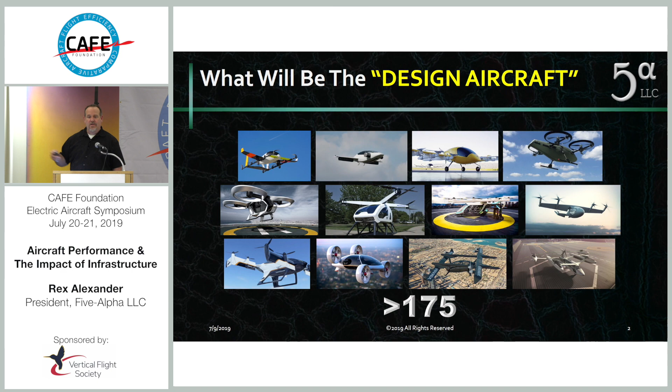So what we're basing a lot of what we have on today is what we currently have in infrastructure today. When we look at infrastructure, we have airports and heliports. I use vertiport - that's the most common term. I've heard a bunch of different terms out there, but vertiport's the one I'm going to use. Airports, we pretty much figure that everything's going to be operating at an airport. You have the room to land a helicopter there, jets, turboprops, and we expect vertical lift and takeoff vehicles to land and operate there too.

Heliports - the assumption is that helicopters and probably vertical takeoff and lift aircraft, depending on the standards that we come up with, will operate there. Now I'm getting a lot of calls from investors on, hey, I have this heliport, I want to make it a vertiport, what should I look for? It gets a little more complicated than just a piece of property somewhere. You have a lot of different layers you have to go through. Then the vertiport - we haven't really decided exactly what that looks like. Personal opinion, it's going to look very similar to a heliport with some minor nuances.

Now, the key question is here, when we look at all the things that are going on in this industry today, specifically around the idea of some of the things we see on video, these wonderful animations.

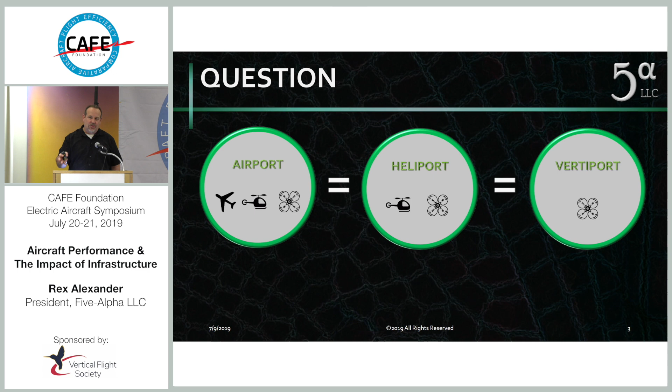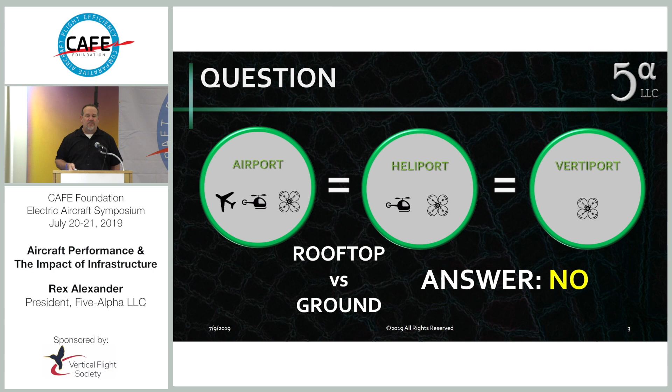Even some of the vehicles flying today, you see these tests in a pristine environment at an airport with lots of room. Now, having worked in the other world, rooftop versus ground, a lot of my work is up on buildings, and it's a whole different environment. We have to take a lot of considerations into account there to build something safe. So are these equal? Yes and no. On the ground at airports, yeah, probably. But once you go on the roof, all bets are off.

Now, key performance criteria, we look at helicopters, so I'll look at what we deal with today. Pilot workload is a big one - how much work is the pilot doing to keep that aircraft under control? Now with autonomous aircraft, how much work and how can the computer keep up with that? Probably better than the pilot in many cases, but that's something we have to factor in.

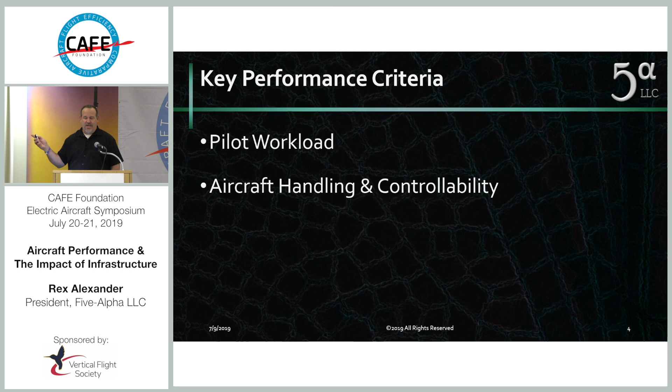Handling and controllability characteristics - some aircraft are better than others. I've flown many aircraft that deal with these environmental issues better. Also, training and education, knowing what you're getting into before you get into it, has an impact on this. Aircraft performance margins - how much do you have before you over-torque or over-temp the aircraft? I've seen bad infrastructure cause this to happen quite often because the pilot was asking more from the aircraft than it was capable of providing that given day.

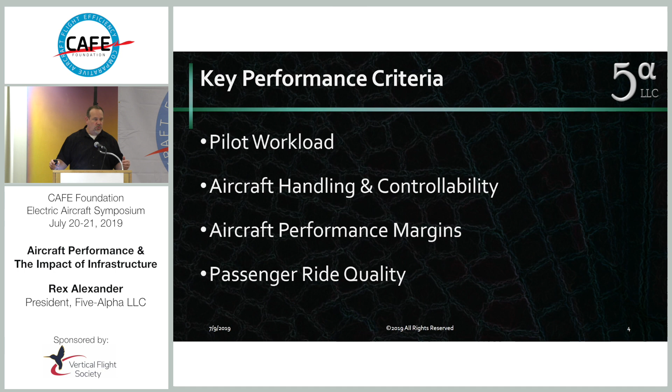And then the passenger ride quality - this is one I'm working right now with NASA Ames and PK's folks. The idea is you don't want passengers getting off your aircraft with a sick-sack in their hand every time, or they're not going to come back. So we're actually creating infrastructure and doing simulations on what this looks like, and what this vehicle can and can't do in this infrastructure.

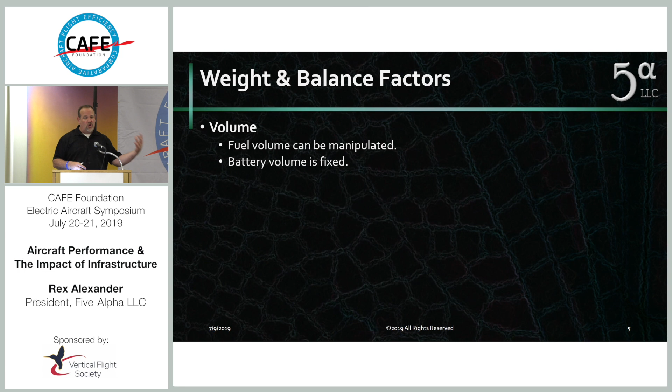One of the things that came up about a week ago, we talked about weight and balance. In aircraft today, flying EMS and some underpowered aircraft, one piece we could play with on any given day was the fuel. Volume of fuel can be manipulated, battery volume is fixed. This became really important because on a nice cold day you can carry more weight, on a nice hot day you can carry less weight. We had this saying in EMS: I can either carry ass or I can carry gas, but I can't carry both. So you have to balance that.

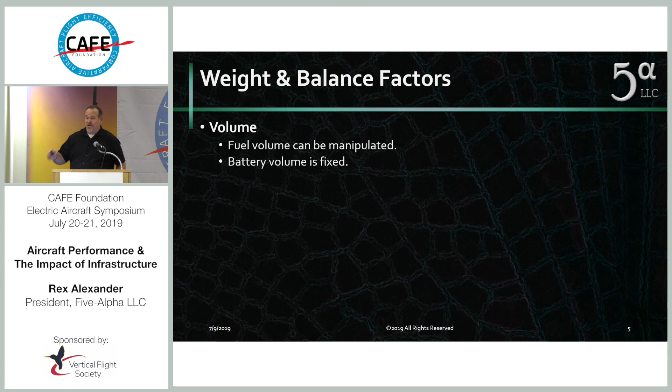There were many times we'd have to keep our fuel down to a lower volume. If we got a really long flight, we'd add fuel for that. But if we got a really short flight, we'd have to keep it really low because we knew we were only going 6 minutes out, and we wouldn't be able to take off given the performance values of that particular aircraft. Turbulence and winds also have an effect.

So weight and balance during flight - with fuel, it's always changing, so the weight and balance envelope is constantly moving. What we're looking at here is the weight and balance envelope - not going to change that much. You're going to land and take off with pretty much the exact same weight. That's good and bad in some cases.

What we look at is the landing max gross weight - are these aircraft going to land at max gross on every given occasion? If it's a 7,000 max gross aircraft and I fill all 4 seats, I have no manipulation now of the fuel. What's that look like for landing? A lot of times we can take off with less weight in a helicopter, and land with more weight. And it's all about whether you can hover.

In the Gulf of Mexico, when taking off from a rig, the rule of thumb was if you can achieve a 3-foot hover, you could take off. Now I saw a 412 try to take off from a rig that could only achieve about a 1-foot hover, and when he got out of ground effect, he disappeared. He got into ground effect over the water, and we watched him for about 4 miles until he finally achieved a climb. Yeah, he probably had to go home and change his underwear.

So these are some of the factors we deal with, but we can manipulate weight by fuel. In EMS, you never knew what you were going to get into. A lot of times you'd show up and they'd say, oh yeah, the patient weighs 200 pounds. You walk in the door, and they haven't seen 200 pounds in 10 years.

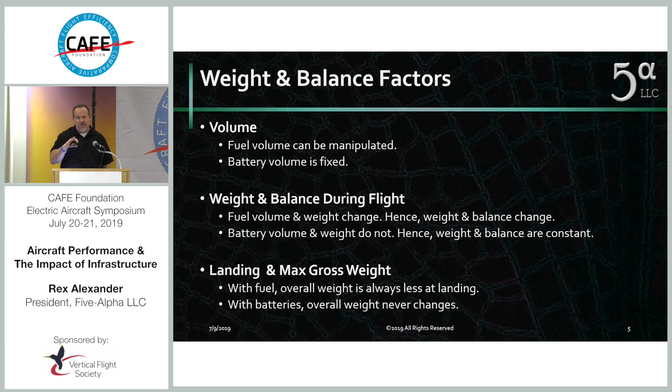Now in this, I don't have that factor. We have to be very cognizant of the performance capabilities of these locations we're going into. Environmental factors, winds, crosswinds and tailwinds. Tailwinds we want to avoid. Crosswinds we need to account for. We always like to land into the wind whenever possible. Turbulence, updrafts and downdrafts, we've got to compensate for. Power margins, we want control, compensate for anything that hits us, and then overcome that. Those are the things we look for.

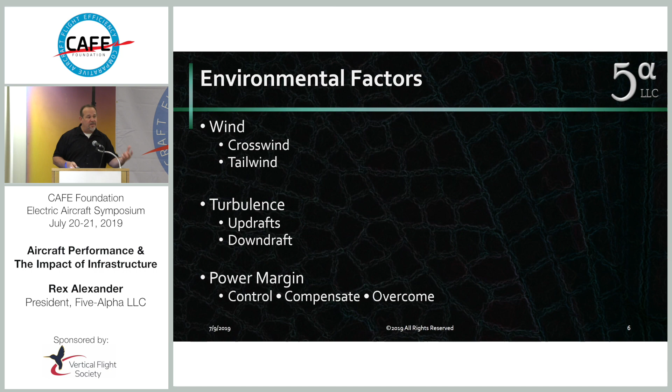And sometimes the helicopter can't do that. I've been in those environments where you had to fly out of it or fly away from it, or just don't land there because you can't overcome that. So it's not a safe situation.

This is a video of a helicopter landing on a heliport that was poorly designed. This was put flat on the roof, and that's the last thing you want to do with a heliport. You want an air gap for air to flow under.

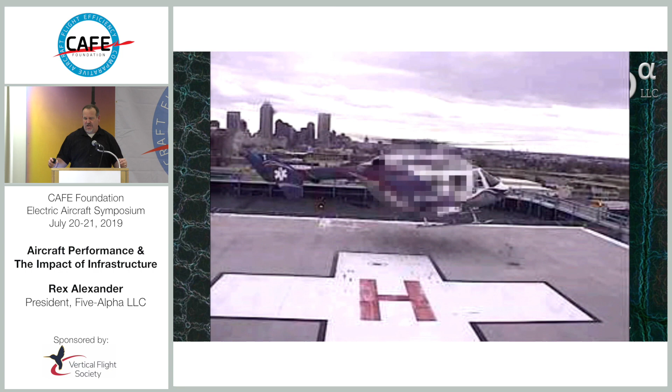Aircraft comes in from the upper left. Pilot's trying to control it. He gets into a bumpy ride at the end, trying to get it on the ground. Wind's coming off his nose, about 27 knots based on the AWOS. This is 9 floors up. He's trying to get it on the ground. Finally, sticks it on the ground. So it's bumpy.

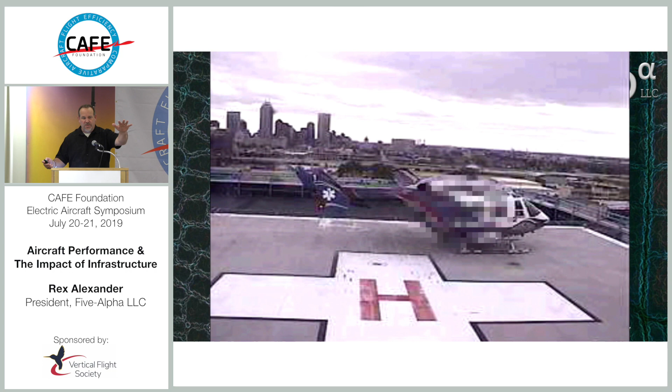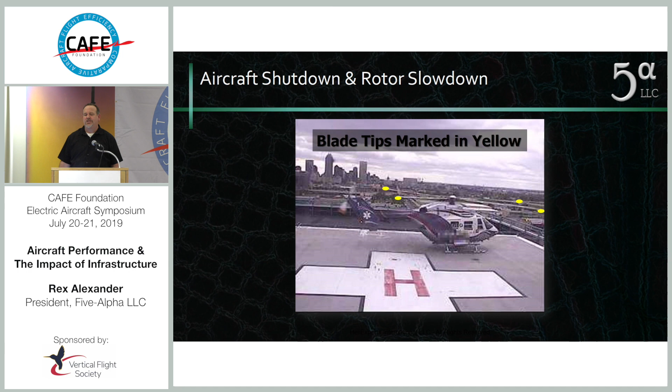Now with that, this is shutdown. So I mark the blades in a static position. He's at idle, and he just shut the engine off, and he's in coast down. So the advancing blade is closest to you, the retreating blade is farthest away. These are the points that they move from and to. If I can get this thing to cycle.

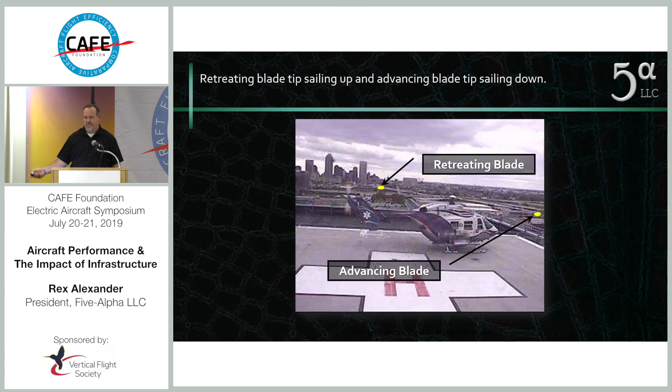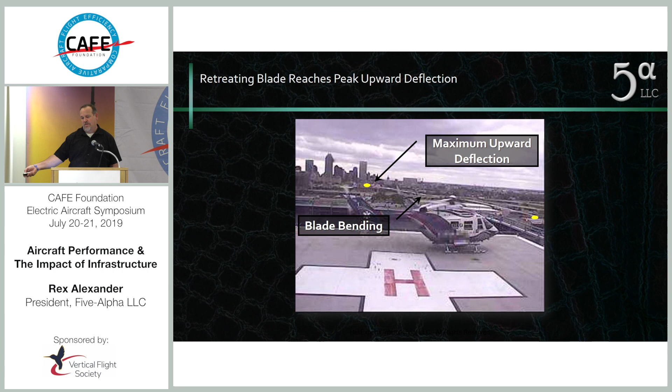So the advancing blade's going forward and drooping. The retreating blade is coming up. Wind, again, is off the nose. We get about a 6-foot deflection in the front. These blades are static at 9 feet.

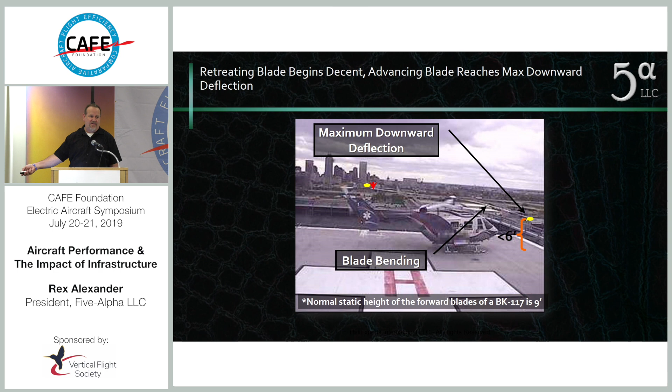That's why I always tell crew members this: never ever exit an aircraft during shutdown. If you're 6'2", you may not be any longer.

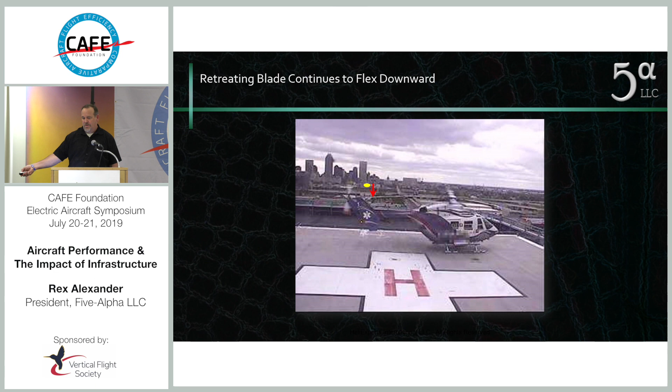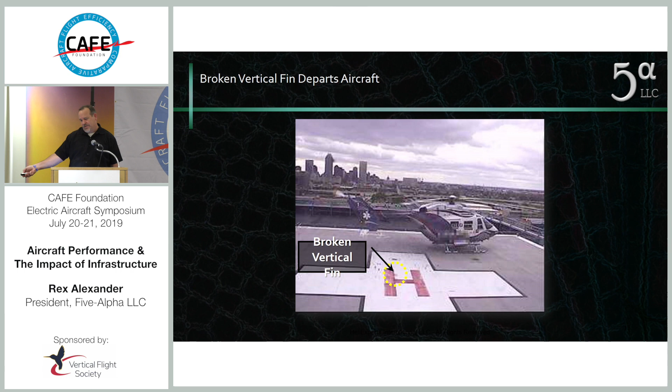Now the retreating blade, as it comes past the tail boom, starts to droop. It goes about 5 feet 5 inches, we figured based on calculations. It's hard to see in that picture. That piece of the tail boom goes across the pad.

Now this is a different accident. Blades came down, took out both vertical fins, separated the back end of the blade. Looked like a pita pocket when we got done. Again, this is one of 5.

We almost cut the tail boom off of one aircraft. Now in New York, there was an actual NTSB accident where they actually did cut the tail boom off of a BK-117 because of this problem.

Turbulence. So the advisory circular that the FAA put out, they had done wind tunnel testing to identify turbulence in and around buildings. In there, they talk about a 6-foot air gap, clear air gap underneath the pad. Well, I tracked down the guys that actually did this, and they said they never really tested it. That was kind of a swag.

So we actually have done a lot of wind tunnel testing, and this is a 6-foot air gap. We get a little airflow underneath the pad, but not enough to make the difference. What we're looking for is to get that air that's coming up the side of the building to go under the pad so the top of the pad is a nice clear laminar flow. In this case, we don't achieve that. We find that it's at least a 10 to 12 foot gap that's clear.

That's why I lean very heavily towards parking garages, because they're usually perforated on all 4 sides, which lends itself very well to this. And a lot of the retrofits that we're looking for, I climbed around 30 structures in downtown LA for Uber, looking at what makes a good location.

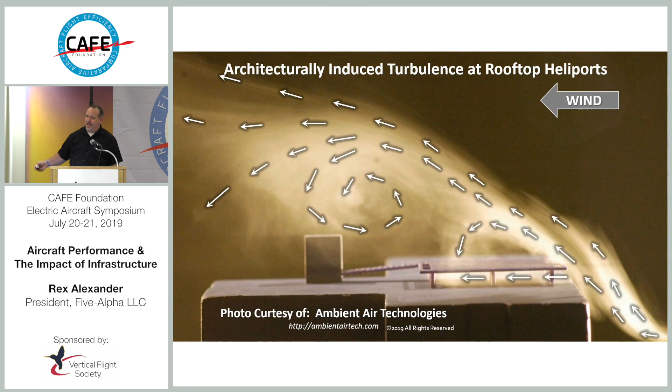So in a case like this, you can see where the different circulations go. And what we run into is, and I've ridden this roller coaster many times in my career, and I was fortunate, I'd never over-torqued or over-temped or bent an aircraft, but I had several friends who have. So in the headwind, you got good performance, and all of a sudden you get that downdraft, tailwind, updraft.

So you're going through this cycle, and right about the time you get over the pad, you get this downdraft. It will try—it's like we call it the hand of God trying to stick you into that pad.

One of the things I like about the electrification piece is the ability to have instant power. Turbines don't have that. When I pull that thing up really quick, it lets me know because it droops and lags, and its pucker factor goes up by an exponential point. If I had something that had that instant power, the controllability would be off the charts.

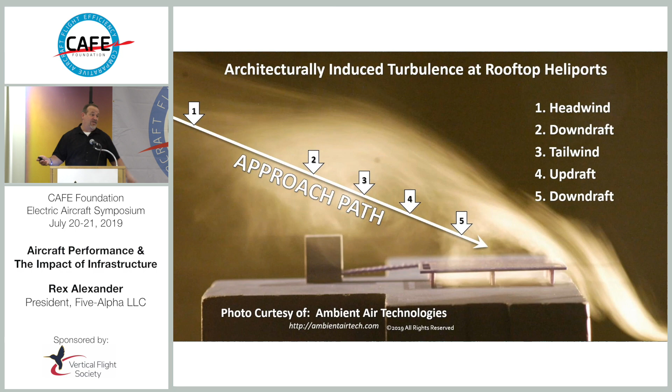Now, if I was maneuvering it, I could see that the pilot might over-control in a case like that. So we need something to manage that.

So this is a project we worked on in Chicago. Lurie Children's Hospital is one of the most contested heliports I've ever been on. But it's in downtown Chicago, so this is the definition of an urban canyon.

So you look down here on the lower right corner, notice the windsocks all 4 point in different directions. It is what it is.

We actually put an AWOS 3 up here so we'd have information going to the pilot, because the difference between ground-based weather and rooftop can be significantly different. And they don't call it the Windy City for nothing.

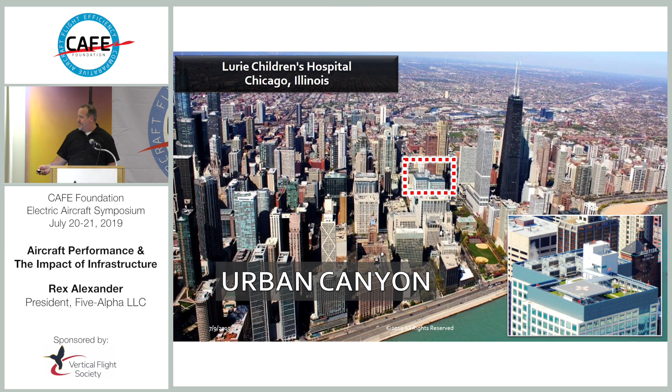So we spent a lot of time modeling this. We worked with a company called RWDI. We miniaturized Chicago and put it in a wind tunnel.

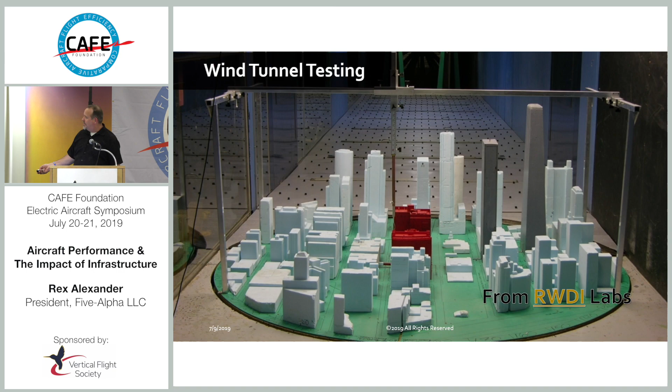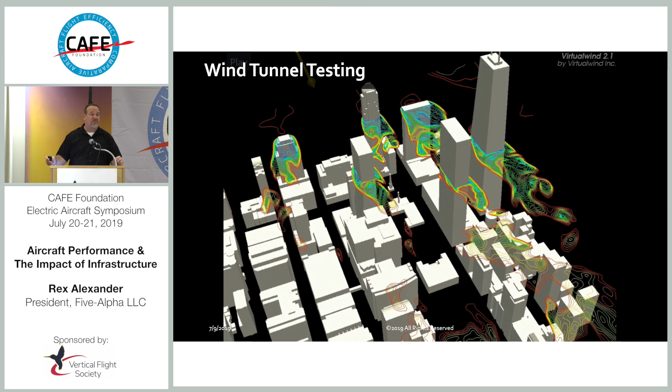I spent some time with these guys, and we actually mapped out the airflow, looked for where the problem areas are, where the issues we're going to run into are, where we need to avoid, and where the better places are. So we then put in our approach and departure paths for testing based on some of this information.

Now, once we got done, we had to prove beyond a shadow of a doubt that this was safe, because we had a lot of people that didn't like the idea of doing this.

So we outfitted a helicopter, a Twin Star, with I call it the poor man's flight data monitoring system, the Appareo Vision 1000. Great product—they're actually here at the show. We do in-cockpit recording of the cockpit itself, seeing what the pilot's doing.

I was videotaping quite a bit from the right seat. We also have the capability of playing back in 3 dimensions, and then we have the telemetry picking up your airspeed, ground speed, rate of ascent and descent, and all the G-forces acting on the situation. So we flew—should be sound.

There we go. Not real good sound, but there should be sound.

So we flew this 82 approaches and departures over a 4-month period in multiple wind conditions to prove that it could be done. Now, the key here is we knew it wouldn't be able to be done under all conditions. There's an operational limitation in this case of 25 knots being the maximum. That's the cutoff point—under that, we proved that we could do it safely.

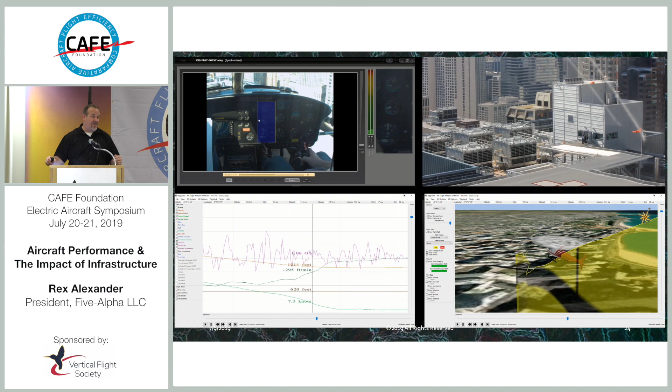We had controllability. Pilot workload was not excessive, and ride quality was good. And when we got done, we found places that we shouldn't go. We tested it and found some areas that were definitely areas you wouldn't want to fly through on a regular basis. It was a challenge.

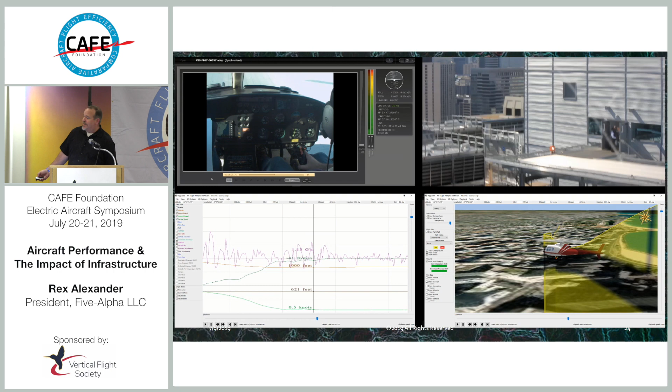Yeah, so that was, like I said, one of the most over-tested heliports in the world, I think, as far as testing goes. Now, this was one of the latest ones I was involved in—the 1000 Museum in Miami, Florida, 65 stories in downtown Miami.

So in this case, we actually designed the heliport. Now, we were having a challenge—we did the wind tunnel, but architecturally, we got into this issue of what was, quote, aesthetically pleasing. And I said aesthetically pleasing is another term for really, really dangerous in the aviation world.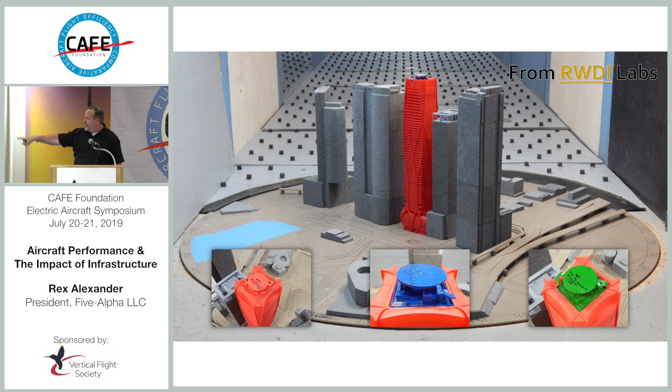So we mocked it up with the same group, RWDI. We had a 5-foot, a 15-foot, and a 20-foot rooftop. And this is some of the video—this is doing the 5-foot test.

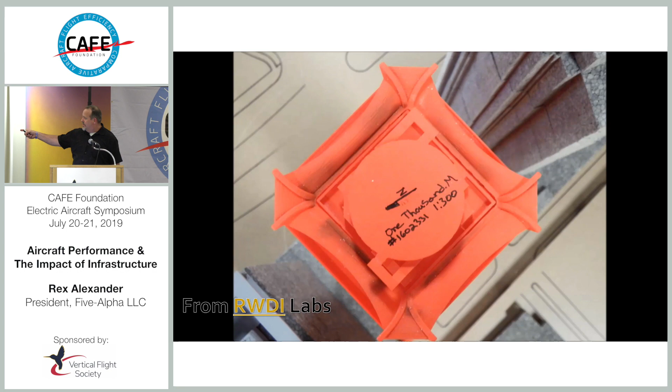And we pretty much knew where we were going to get. We were still getting that burble in that turbulent zone. And mind you, these guys wanted to fly single engine R-44s up here.

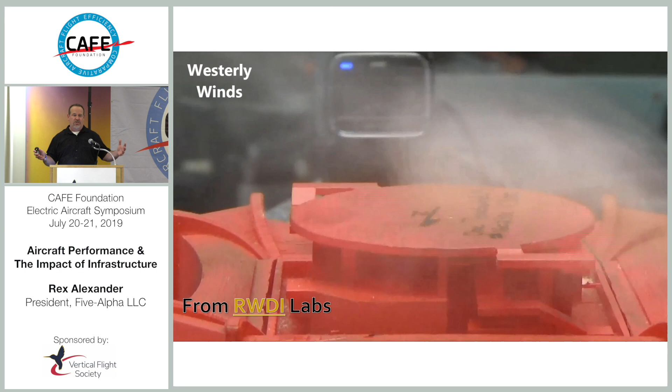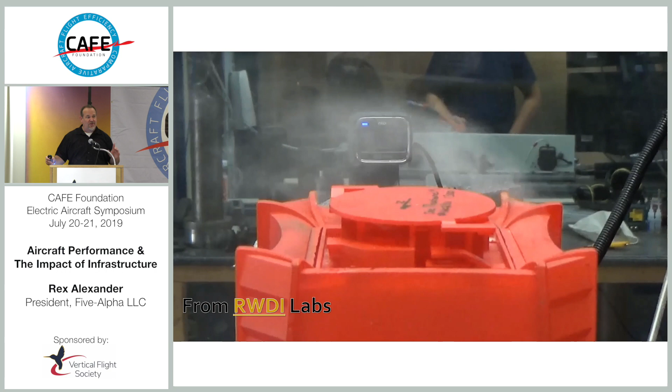Well, on a clear day, with a little bit of fuel and only 1 or 2 passengers, it's doable. But in slow motion, you can see where you really start to see that turbulence. It's going to push whoever goes through there towards that pad.

Now this one, this is the 20. You can see that it's actually getting underneath there pretty good, and we're not getting the burble that we're getting on the 5. So this is working, but the problem is it's not aesthetically pleasing.

They spent a lot of money on this building. It's designed by a very famous architect, and they said no, we can't put it. So we had to put the operational limitation on it. At 20 knots, 65 stories, and it's a 60 by 60 pad up there, that's when you cease. So we put a wind speed indicator up there to make sure. They were okay with that, they didn't want that ugly pad up there 20 feet above it looking like somebody's top hat on the building.

Now, in closing, I will say, if you build it, they will come, right? They don't tell you who will come. You don't know, when you go through all this work, all this effort, all this research, what's the first thing they put on the pad?

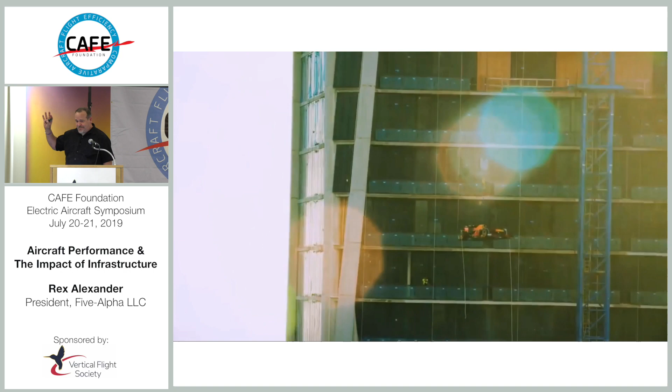But they did donuts on my pad. It was impressive the work they did to get this thing up there. Somebody asked me, how'd they get that car to stay on the pad? That's where they drill a hole through the tire and drive this huge bolt into the concrete, and it just stays in one point. But it looks really, really cool.

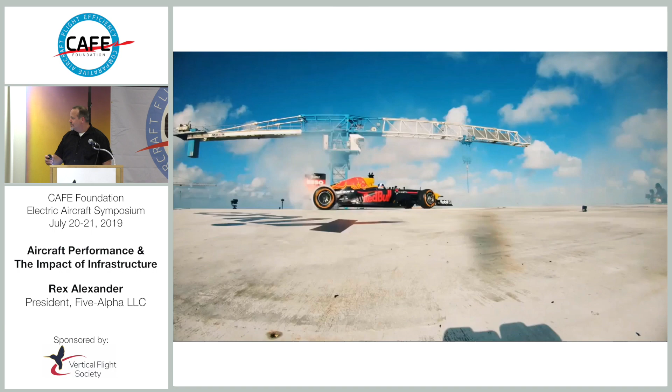And I got to say, that's some of the best video of that pad ever shot, and it was for that commercial. But in that lies kind of an insider's joke, you never know what's going to show up at one of these heliports or vertiports. And we have to be careful where we design it to, what standard do we design it to, and you don't want to design it to the absolute lowest denominator, because we get into this issue right now.

This is one of those things we're working with the FAA, airports, and standards on: heliports and vertiports in the future may be different, in that heliports and airports currently are quantified as public use and private use. If you look at that, there's about a 65-35 split in airports, so 65 private, 35 public. Airports are totally different though.

When you get to heliports, it's 1 to 99. There are 60 public use heliports in the United States. 99%, over 5,600 plus known heliports—because there's about 1,600 to 1,800 more that we find are missing—are private use. And the key there is, while the FAA has guidance, recommendations, and criteria, the FAA has no authority over private use facilities.